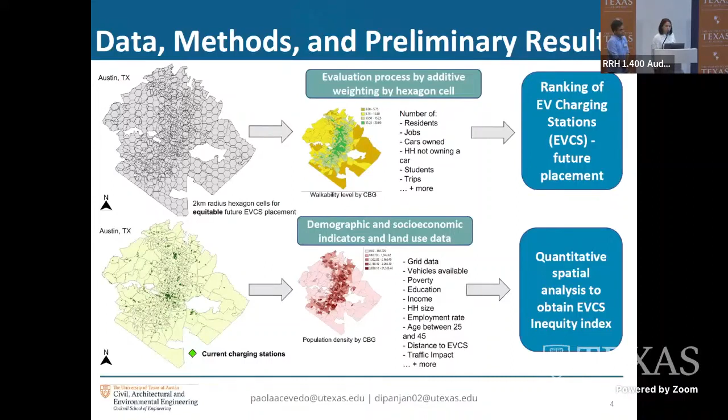Preliminary results show that 32% of census block groups contain the current charging stations, of which 75% are predominantly white neighborhoods. And there is a perceived inequity for low and medium income areas, because almost 50% of the charging stations are located in high income census block groups. We aim to address the increased EV adoption and the challenges of placing these new charging stations with grid constraints and land use constraints.

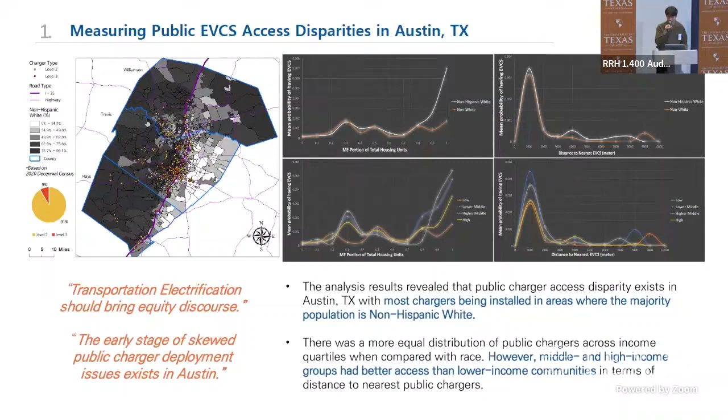So for our first study, the public electric vehicle charging station access disparity measurement confirms that Austin is currently experiencing the early stage of public charger deployment issues. For instance, the non-Hispanic white population will have a higher probability of having public electric vehicle charging stations than the non-white population, and also the upper middle and higher income quartile groups will likely have a higher probability of having chargers than the low income regions, as we control the portion of multifamily housing and the distance to nearest public charging stations.

And based on our descriptive analysis, the statistical test using a nonlinear model also confirms that the ratio of non-Hispanic white population, number of registered EVs, household income, the ratio of above the poverty level, and the distance to electric vehicle charging stations all have a significant impact on the probability of having public electric vehicle charging stations. So here, we conclude that historically disadvantaged communities, like race and income groups such as lower income and communities of color, also experience a more pronounced disparity in Austin too.

And then for the second pilot study, we moved on to uncovering the hidden spatial disparity involving electric vehicle ownership. Here we employed K-means unsupervised machine learning techniques, which went through the optimizing process using the silhouette score calculation and the elbow method, and which later went through the statistical mean tests, known as ANOVA and Tukey's, to tell the significant difference within the clusters.

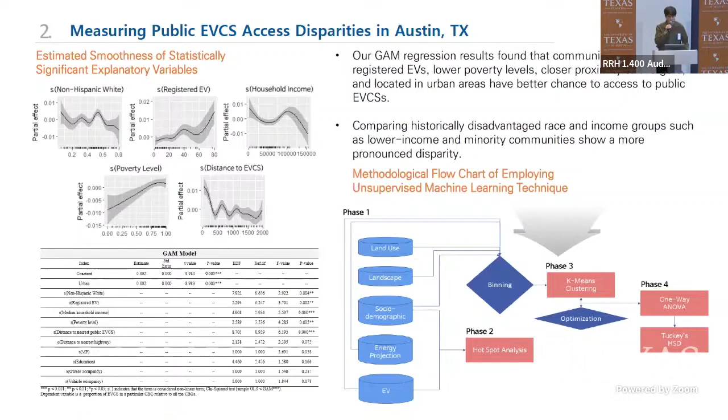So first of all, for the simplified version, the hotspot analysis result, which only uses the explicit EV ownership data, shows that the hotspots where EV ownership is high have a 29 percentage point higher chance of having non-Hispanic white population than cold spots, and the mean median household income in hotspots is 81% higher than the cold spots. And this result is obvious because we all know that the I-35 interstate highway demarcates the city between the east and west side of the city. And we all know that the west side of the city is the region where white alone and higher income

In West Austin, for instance, there was a cluster with a high EV registration rate composed of a greater portion of white alone population, higher income and education levels with graduate or professional degrees, and ownership of multiple vehicles. And notably, these clusters had more single-family housing units and open space land use, but were also projected to consume greater site energy, even though they own multiple vehicles and EVs.

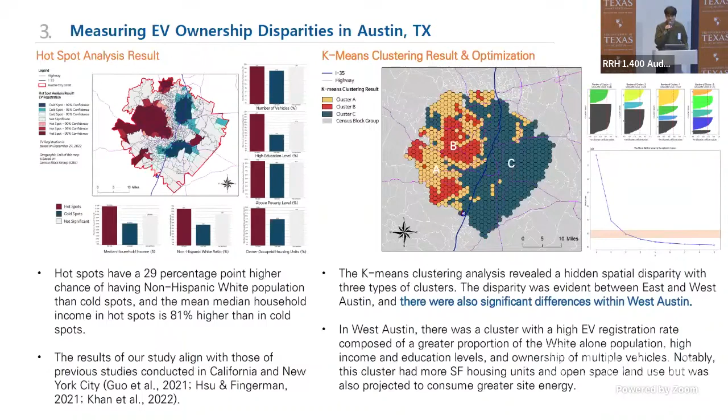Next, we go to clean hydrogen. Ammonia reforming to hydrogen using non-equilibrium plasma discharges. The PIs are Fabrizio Bisetti, Thomas Underwood, and we have Drew.

Right, correct. Yes, so I'm the PI on the project. And so I'll be telling you about some work that we've done together with Thomas Underwood. He's the co-PI on the project. Drew and Sai are the 2 students working on the project.

So we're interested in ammonia reforming to hydrogen as a way to add value to ammonia. And the way we want to do that is through non-equilibrium plasma discharge. Of course, there is a poster later on that I encourage you to visit where Drew and Sai are going to be there. So the basic idea here that we're pursuing is that plasma discharge may make reforming of ammonia to hydrogen, either complete or partial, much more efficient.

So we acknowledge the fact that ammonia has great potential as a hydrogen storage, as well as a hydrogen vector, as well as directly as a carbon-free fuel for power generation. You want to reform it to hydrogen. You want to do that through the 2NH3 to 3H2 plus N2 reaction. That is usually done by transition metal catalysis at 600 C and elevated pressure.

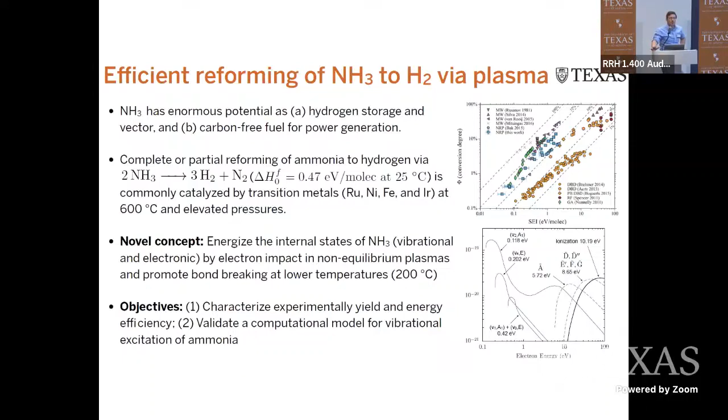So the idea is that we want to take ammonia and use plasmas to energize its internal degrees of freedom and make it effectively a non-Boltzmann distribution of the internal degrees of freedom. The idea then is that when ammonia is energized, it's gonna react more readily with the catalyst at lower temperatures. So ultimately, you wanna achieve the same conversion efficiencies, but at significantly lower temperatures, opening up the potential for distributed ammonia reforming. The way we energize the internal degrees of freedom is by having electrons impact the ammonia, and once the electrons impact ammonia, they're going to energize its internal degrees of freedom, mostly vibrational excitation.

So here are 2 slides on our preliminary results. And again, I encourage you to talk to Drew and Sai during the poster session. The preliminary experimental data demonstrates that hydrogen is produced when a stream of ammonia is subject to radio frequency excitation with electrons that have fairly low energy. And again, vibrational excitation of ammonia and subsequent perhaps decomposition to hydrogen is optimally achieved at about 0.1 to 0.5 eV.

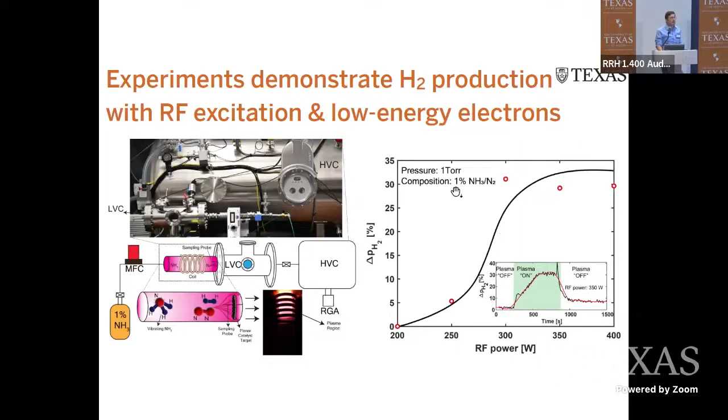And what you see on the right-hand side here is a plot of the partial pressure of hydrogen that is formed downstream of a radio frequency discharge. As the radio frequency power increases, we start seeing more and more hydrogen being formed. Now, this is without a catalyst and at very low pressures down to 1 torr.

And so this, of course, is modeling as opposed to an experiment, but we're working the experiments towards proving or disproving this model prediction. If in fact this model prediction is accurate, that means that having vibrationally excited ammonia allows an extra degree of freedom in tailoring the catalysis of ammonia to hydrogen.

All right, so good afternoon, everyone. My name is Jing Lian, and I'm a first-year grad student in Dr. Wang's lab. Today, I'll be presenting my research on computational modeling of nickel oxyhydroxide for water splitting.

So hydrogen has been an important source of energy in the renewable industry over the past decades, and the demand for hydrogen is projected to increase 4-fold by the year 2050. So to meet this demand, it is important for us to refine or develop our current hydrogen production methods. One of these methods is electrochemical water splitting, which can be split into 2 reactions, the hydrogen evolution reaction, HER, and the oxygen evolution reaction, OER. The oxygen evolution reaction is the kinetically limiting step in electrochemical water splitting because it involves a 4-electron transfer in the overall process. So it is important for us to develop a cost-effective and efficient OER catalyst to facilitate the overall hydrogen production.

Nickel oxyhydroxide has been reported as a promising OER catalyst, especially in alkaline media. Recent studies also found that the catalytic activity can be further enhanced by transition metal alloying, so in this case, we'll be introducing iron atoms into the nickel, and also by introduction of structural disorder to produce an amorphous surface. Despite knowing this, the optimization of nickel iron oxyhydroxide is limited due to the poor knowledge of the structure activity relationship.

To approach these questions, our research group proposed a combined computational and experimental approach, where we will benchmark simulated and measured X-ray absorption spectroscopy to study the structure activity relationship. By doing this, we will be able to illustrate the combined effect of mixed transition metal and amorphization on the catalytic performance of nickel iron oxyhydroxide.

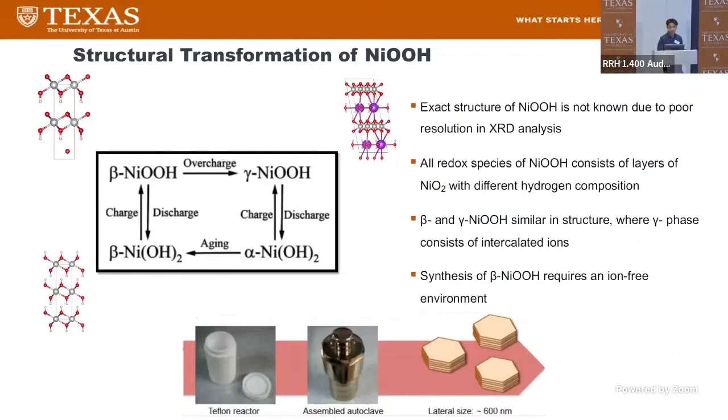These are the models of nickel oxyhydroxide I use in my study right now. The native structures are developed by directly removing one hydrogen atom from the nickel hydroxide. The staggered structure is the duplication of the native structure in the horizontal axis, with every second hydrogen atom in the opposite location. The alternate layer structure consists of an interchanging layer of nickel hydroxides and nickel oxides.

This structure is proposed by another computational group developed using a genetic algorithm approach. The last structure is the modified staggered structure, developed by duplicating the native structure in the vertical and horizontal axis, and also by slightly shifting the second layer by half a formula unit cell.

We also found that the relative energy difference between the alternate layer structures and the modified staggered structures is as low as 0.005 electron volts. This indicates that both structures are highly stable, and the actual crystal of beta nickel oxyhydroxide might contain a mixture of these structures.

Overall, we are able to determine that the alternate layer structures and modified staggered structures would be the best models to predict the actual crystal of beta nickel oxyhydroxide. With this as a foundation, we will be able to develop structures for nickel iron oxyhydroxide, and with the help of our experimental collaborators from Dr. Resasco and Dr. Mullin's lab, we will be able to elucidate the structure activity relationship in the future.

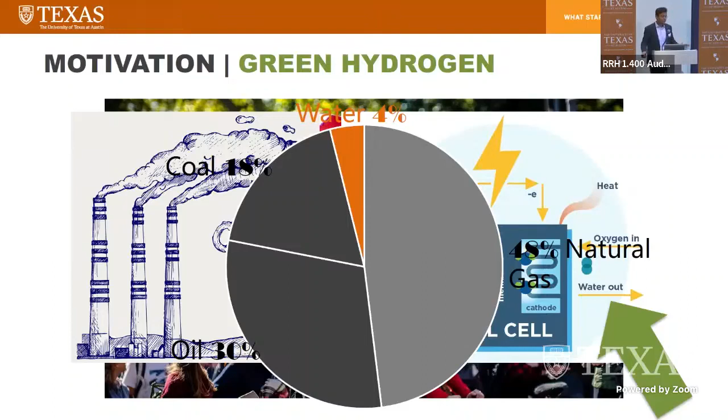However, the rest, 4% of the hydrogen, which is actually green hydrogen, comes from electrolysis of water, or in simple terms, water splitting. This is where we want to make a dent by increasing its share, by making this process as cheap as possible. One of the ways you can make water splitting cheap is through finding effective catalysts that are also non-rare earth materials that can break the bond between hydrogen and oxygen with minimum activation energy barrier.

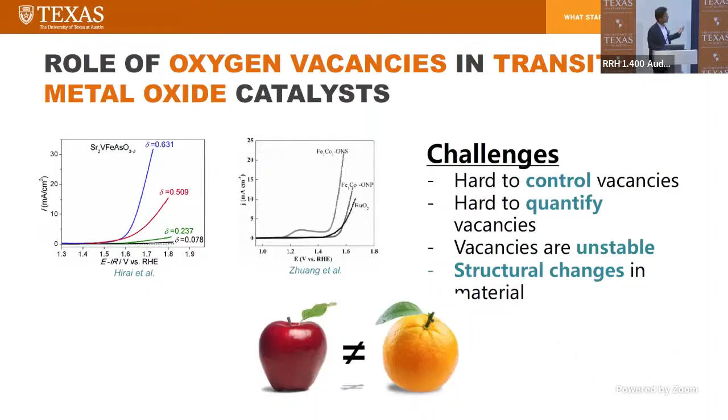But what we lack today is understanding of the mechanism for this. The reason it's hard to understand the mechanism is because of the challenges associated with it. It's hard to control oxygen vacancies in your material. Even if you have created oxygen vacancies, it's hard to quantify the actual oxygen vacancy concentration. Also, oxygen vacancies are quite unstable, so they may not last long in the material. Finally, most processes that lead to oxygen vacancy creation also cause structural changes or damage to the material, leaving you with a comparison between apples and oranges.

We in the Milliron group have developed a synthetic approach to control the formation of oxygen vacancies in nanocrystals using spectator metal salts. We think this is a great step forward, which would lead us to understanding how oxygen vacancies play a role in catalyzing oxygen evolution reaction in water splitting.

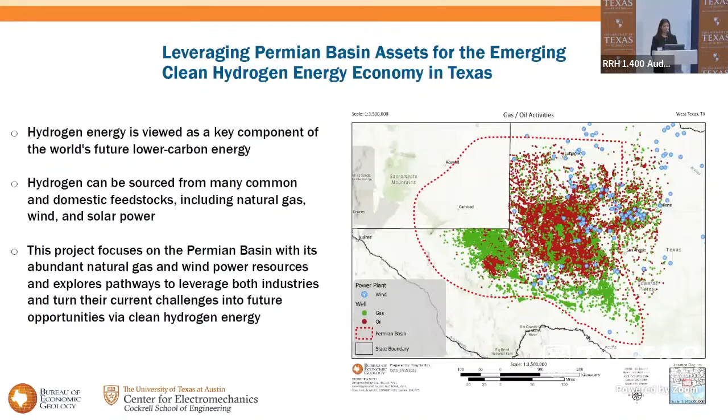Our research focuses on the Permian Basin with its abundant natural gas and wind power resources, and explores pathways to leverage both industries and turn their current challenges into future opportunities via clean hydrogen energy. The Permian Basin accounts for 40% of United States oil production and 25% of its natural gas production. It is also a leader in solar and wind development, with more than 37 gigawatts of wind power installed capacity, accounting for 24% of the electricity grid in Texas.

The second technology is water electrolysis that uses wind power as the electricity source, splitting water into hydrogen and oxygen. In the levelized cost analysis we performed, we obtained a cost of $1.5 per kilogram of hydrogen produced in the SMR process. 25% of this cost is regarding CO2 capturing, and the feed cost price, meaning the natural gas price, is the key driver. In the case of electrolysis, we obtain a levelized cost of $2.6 per kilogram of hydrogen, and electricity price is the key driver.

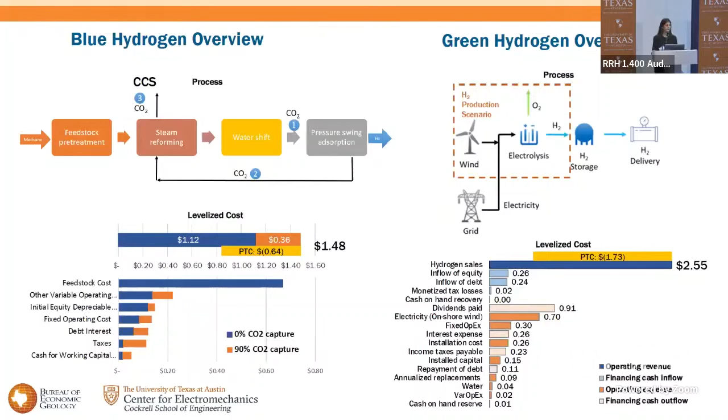To summarize, hydrogen is key in decarbonization, and the Permian Basin plays an important role in this recent challenge. If we assume a PTC of $1 per kilogram of hydrogen in SMR technology and $3 per kilogram in electrolysis, we can observe that this credit can make them both cost competitive to one another. Another important factor is that both pathways have low water consumption, around 5 gallons per kilogram of hydrogen.

Moving forward, we plan to study the value of co-products such as CO2 for EOR and oxygen for ATR hydrogen production. We also plan to study infrastructure requirements for transportation and storage of hydrogen and energy carriers such as ammonia. Local demand can cover initial expansion of hydrogen, however takeaway capacities to a regional market such as the Gulf Coast could further expand production. Overall, the Permian Basin is a promising location for the development of hydrogen energy. Thank you.

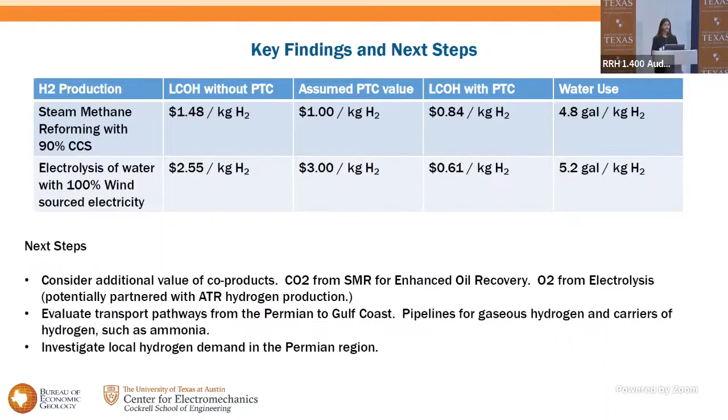Next, we have hydrogen production at natural gas wellheads. Liu Yingda and Kishore Mohanty are the PIs, and Dina. First slide.

Good afternoon, ladies and gentlemen. My name is Dina Al-Hosari. I'm a first-year PhD student at the Petroleum and Geosystems Department. I'll be giving a brief presentation on our research topic titled Hydrogen Production at Natural Gas Wellheads. Our research team consists of Dr. Yingda Liu and Dr. Kishore Mohanty as the principal investigators, myself, and Ha Wang as the graduate students working on it.

The main motivation behind this research is that hydrogen plays an indispensable role as a clean energy carrier in future decarbonized energy systems. Steam methane reforming remains a major route to produce hydrogen. However, conventional existing SMR gas production and carbon dioxide sequestration remain largely separated with little integration.

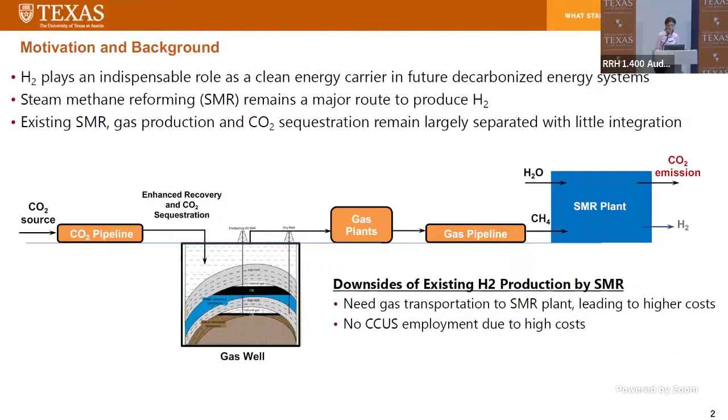So what we're proposing is an innovative process that integrates sorption enhanced SMR, natural gas production, and CO2 sequestration. Instead of transporting methane gas from far gas well sites, why not have the SMR plant right next to the gas wellheads? Instead of using a conventional SMR unit, you'd use a sorption enhanced SMR unit. The methane enters the reformer where it reacts with steam to produce hydrogen and undergoes a water shift reaction, while the CO2 is absorbed instead of being emitted like in conventional SMR. The CO2 is then injected back into these gas wells where it will enhance gas recovery and be sequestered.

So basically, the significance would be that you're producing low carbon hydrogen, also known as blue hydrogen. You're also simultaneously utilizing and sequestering the CO2, enhancing gas production. You'll also create hydrogen hubs in Texas and subsurface hydrogen production technology.

The project consists of three main tasks. The first involves developing reservoir models considering the effect of CO2 injection on gas production. The second involves identifying and evaluating high-capacity CO2 adsorbents for CO2 and hydrogen separation. The third involves carrying out a techno-economic analysis of the integrated process.

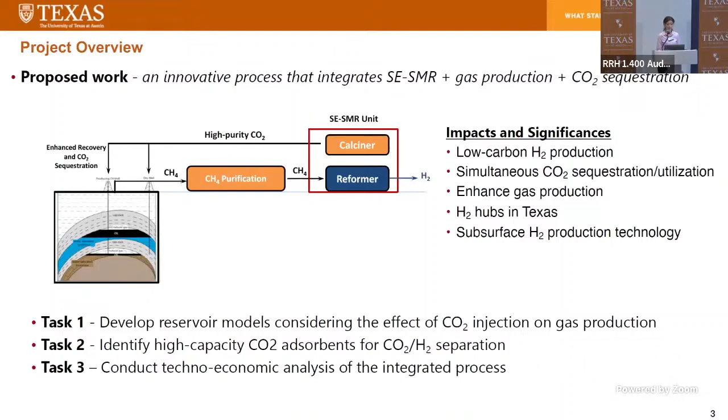So our progress so far in terms of task one: we've already established a representative 2D reservoir model for gas recovery under CO2 injection using CMG-GEM software.

We've also carried out sensitivity analysis to examine the effect of permeability heterogeneity, formation thickness, and CO2 injection rate on the gas recovery factor. As for task 2, we've designed and constructed an apparatus for testing the performance of the CO2 adsorbents. We've also carried out a literature review to identify a few adsorbent candidates for testing. We've also performed preliminary characterization on those potential adsorption candidates.

As for task 3, we've completed the chemical process simulation setup for conventional SMR and sorption enhanced SMR using Aspen Plus software. We've also conducted sensitivity analysis of the pressure, temperature, H2O/CH4 ratio on the methane conversion.

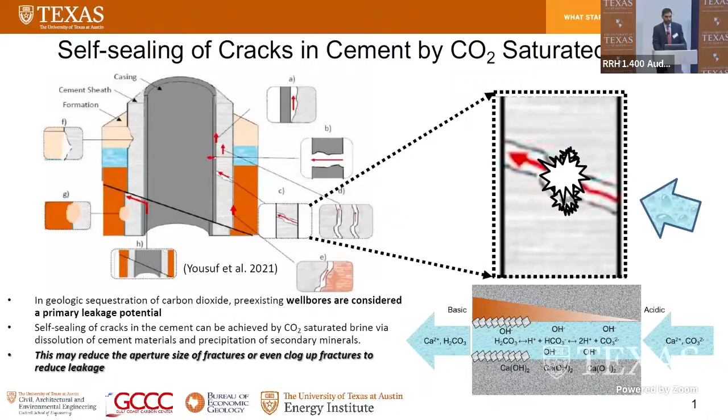So the brine that we inject CO2 in and mixes together is acidified. That dissolves some of the cement, releasing hydroxide and calcium ions, as well as some other free ions, and pushing this carbonate reaction towards the formation of aqueous carbonate, and then a bunch of those free calcium ions. So our approach is to look at this and its capacity to seal up some of those fractures and some of those pathways. And how we do this is we create a microfracture flow cell.

So we take Class H Portland cement, which is used in the construction of wellbores. We make a bulk sample in anaerobic conditions. We fashion it to the dimensions of this chip that we then encase in PDMS, and then we mechanically induce a fracture, and then connect it to our closed system loop and flow our simulated CO2 fluid through there, which is CO2 saturated brine in equilibrium with calcite.

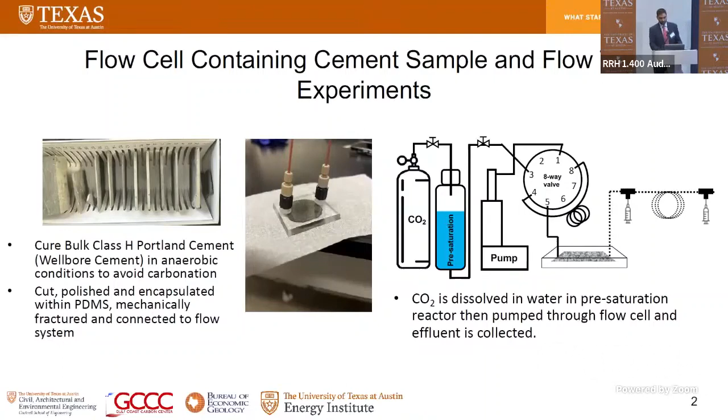And so what we found is that this process actually does clog up the fracture. The longest it's taken so far is 15 hours. There's no more communication between the inlet and the outlet. And so we do see this process actually completely inhibiting the flow across the fracture. But in addition to just that pressure buildup and failure of communication between the inlet and the outlet, we also see some characteristic behavior of the precipitate that's formed within that fracture.

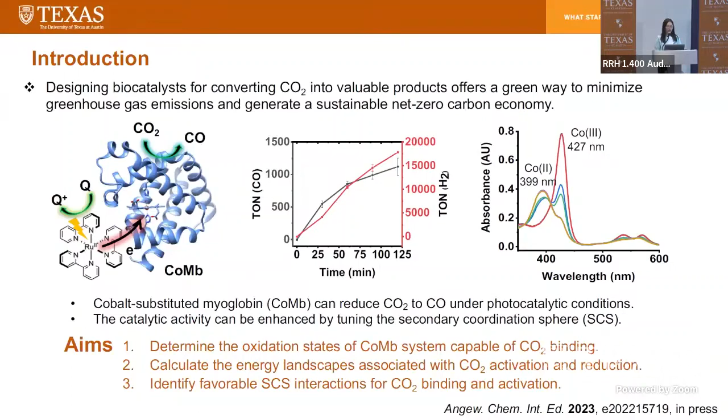The methodology that we apply for this study is called QM/MM, which stands for Quantum Mechanics and Molecular Mechanics method. And when we apply this method to a large system such as myoglobin with hundreds of amino acids, tons of atoms, we need to carefully choose the region for QM as well as the MM region to minimize the computational load. And after we choose the regions for QM/MM, we use this methodology to first perform benchmarking.

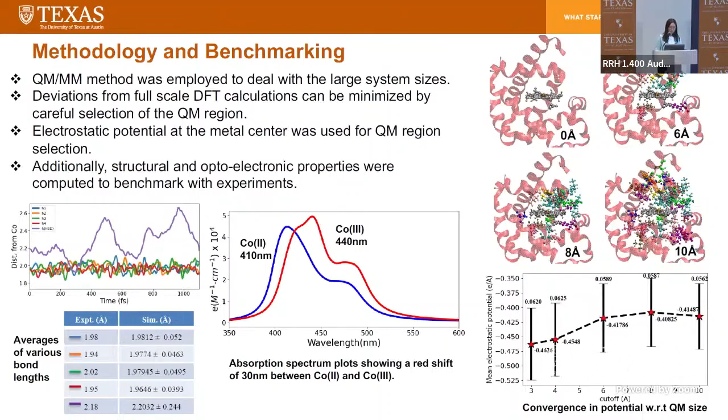We can reproduce the high resolution crystal structure by calculating the bond distances associated with the cobalt and the coordinating nitrogen atoms from both the porphyrin as well as the histidine ligand. We can also do benchmarking to reproduce the electronic absorption features that we observe from experimental studies. And we can see the shift of the absorption spectrum from the cobalt(II) oxidation state to cobalt(III). This actually reproduced our observation from experiments. So with those results, we can now apply the method to the system to make some predictions.

Our preliminary simulation results show that carbon dioxide does not bind to the cobalt(II) oxidation state. However, it can bind to the cobalt(0) or cobalt(I) oxidation state with similar binding affinities, which means that a lower oxidation state than cobalt(II) is required for CO2 binding and activation. We also performed the calculation for the CO2 binding system, and we find that before CO2 binding, there is charge delocalization on the porphyrin system, and upon CO2 binding, there is charge transfer from the porphyrin onto the CO2.

And with these promising preliminary results, we want to further study and calculate the energy landscapes associated with CO2 activation and reduction into carbon monoxide, and use this established methodology to identify the favorable secondary coordination sphere for CO2 binding and activation. And eventually we want to adopt machine learning techniques, which really tackle the timescale limit, to help us calculate the free energy in a faster timescale.

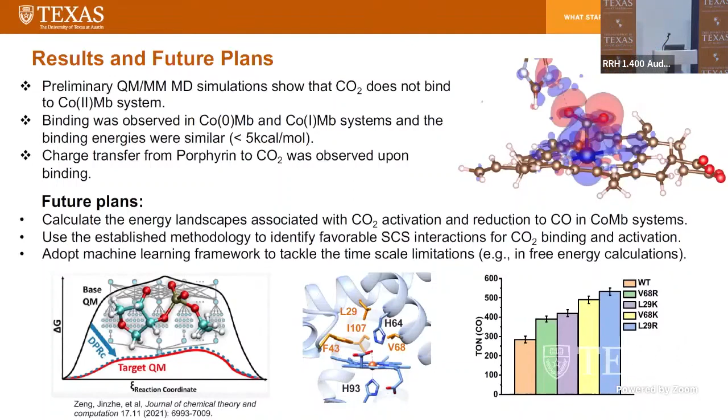Next, we have impacts of geochemistry on carbon dioxide adsorption in organic rich mud rocks. PIs are Zoya Heidari and Nicholas Espinoza.

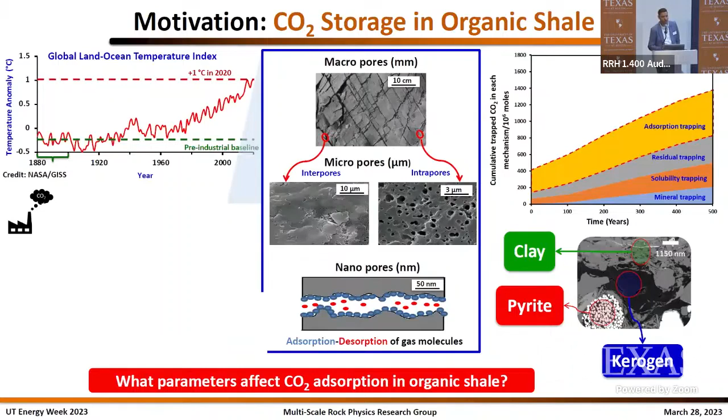So there's a need to understand what are the parameters affecting the CO2 storage in these kinds of reservoirs. Here we are modeling two main constituents of this reservoir, which are clay and kerogen. The kerogen structures we are modeling represent kerogen of different types and different thermal maturity, while for the clay structures we are modeling, we make sure that they represent the pore size of the clay underground. And we made sure also that they represent the chemical structure, and we unified their pore size to check the influence of clay geochemistry on the adsorption process.

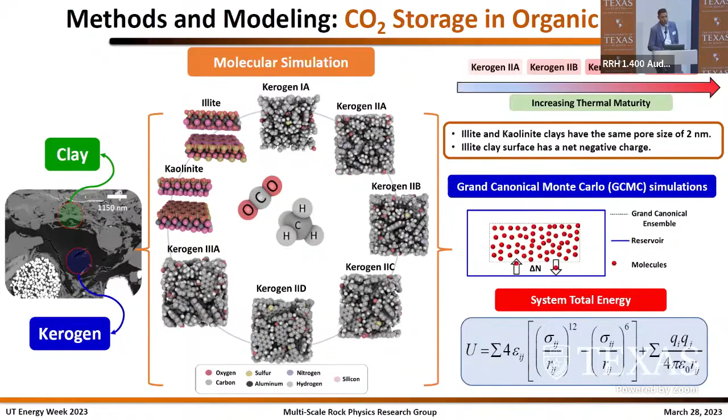The adsorption simulation was carried out in Grand Canonical Monte Carlo simulation, where the chemical potential, temperature, and volume are kept constant, while the number of gas molecules is allowed to fluctuate to mimic the actual adsorption experiment or the actual adsorption process. The total system energy was just a summation of Lennard-Jones potential and the electrical Coulombic potential.

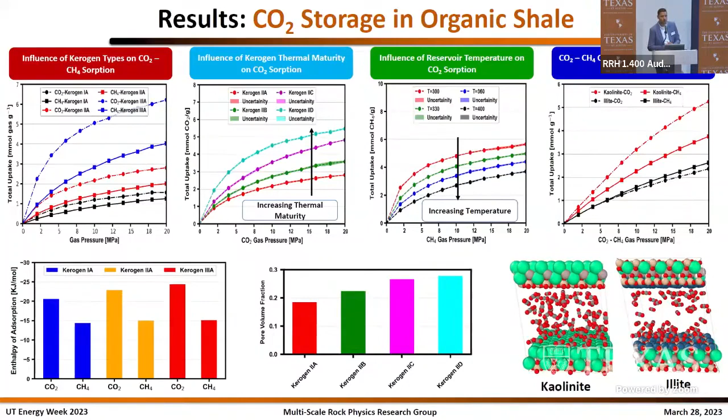And finally, for the clay structures, we noticed that kaolinite clay has more affinity to store CO2 in our models than illite due to the negative surface charge of the illite clay surface. This negative surface charge led to some repulsion forces between the polar CO2 compounds and the surface of the clay. More information you can find during the poster session.

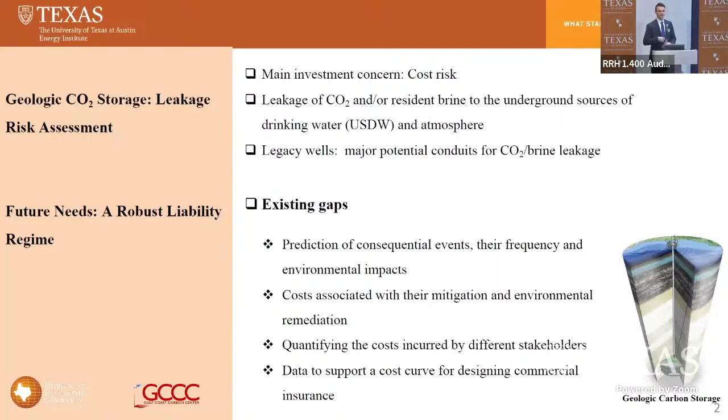And so to answer this question, we need to predict the consequential leakage events, as well as their frequency and the environmental impacts that each event has, as well as the costs associated with their environmental remediation, as well as the mitigation of these leaks. And then to quantify those costs that are incurred by the different stakeholders of the project. And by combining all of these three things, we can develop a cost curve for designing commercial insurance for future geologic CO2 storage projects that will help promote continuing investments into these type of projects as well as larger ones.

So our methodology to tackle this problem consists of these main elements. So we develop a time-sensitive statistical probability model to determine the potential leakage events of CO2 storage. And we do this based on the leakage rates as well as the cumulative leakage as well as leakage duration. And then we can assess the environmental impacts that each leakage event has. And so, for example, CO2 leakage to the groundwater can alter its geochemistry, CO2 leakage to the soil can affect its plant and microbial environment, and CO2 to the atmosphere can be harmful for humans as well as land animals.

And then once we have the probability of a leakage event happening, as well as the environmental impact that it could potentially incur, then we can quantify the costs that would be incurred by preventing such an event from happening, as well as the mitigation of this event. And then we can determine, with stakeholders such as the investors of the project, what costs each individual stakeholder is responsible for in the event that a leakage does happen.

And so we simulated our leakage events using the TOUGH2 T2Well software. And so how we approached this problem was to create a coupled reservoir model where the reservoir and wellbore are two different subdomains and the fluid is controlled by different physics, and there is turbulent and non-isothermal flow, as well as upward and downward flow of CO2 and brine. And so we solve the equations of non-isothermal, multi-phase, and multi-component flows. And we plan on developing the probability distribution of the leakage rates, considering a wide range of geological and operational parameters, such as the distance of the injection well to the legacy well, the rate of injection, the distance to the shallow aquifer, et cetera.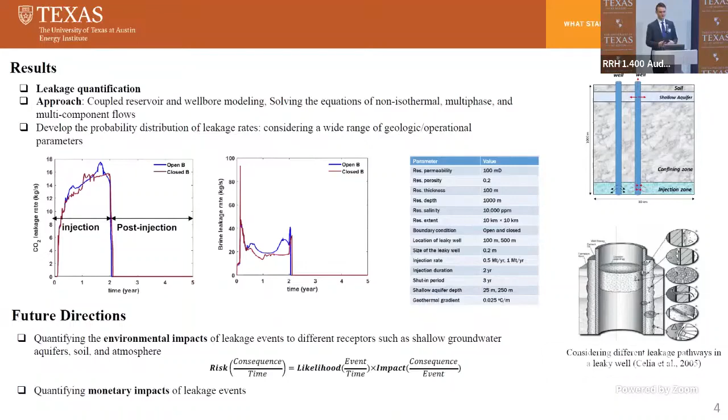Next, we have carbon dioxide hydrates-based carbon sequestration on the seabed. PIs are Vaibhav Bahadur and Yingda Lu, and Awan is presenting.

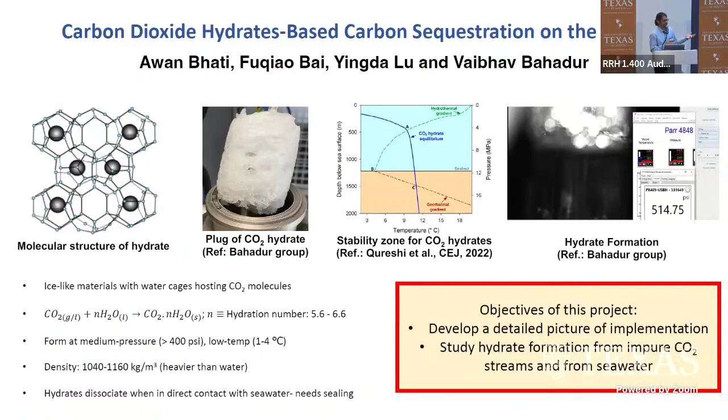And so the objectives of this project is essentially to look at how do we implement such a technology and bring it to market. And the other thing is that, can we use this technology for impure streams of CO2? Let's say we only have a 50% pure CO2 stream. Can we still use this technology to store CO2 while also capturing the carbon? So I'll talk about how we are thinking that this technology can be brought to fruition.

So it will essentially be a two-stage process. First process will be where the CO2 line, which is coming from a capture site, would be converted into CO2 hydrate slurry inside a bubble column reactor. So for each pass, some of the gas will be consumed with the water into CO2 hydrates. The rest will need to be recirculated back for further consumption. And then this slurry will need to be accumulated and then go into another chamber where the slurry would be compacted into a CO2 hydrate plug.

Now this plug would need to be sealed, essentially providing an impermeable coating around the plug, and then they can be stored on the seabed. So from basic calculations, we see that if we look at a 3-meter high CO2 hydrate plug, only a kilometer square is needed for a megaton of CO2 storage, which are phenomenal numbers.

And so an alternative approach we're looking at is that we could make the slurry on the coast and then transport the slurry into the ocean, and then for further compaction, sealing, and disposal. One key benefit is that the ocean is already providing us the pressure and temperature needed for hydrate formation and stability. So refrigeration or pressurization will not be needed.

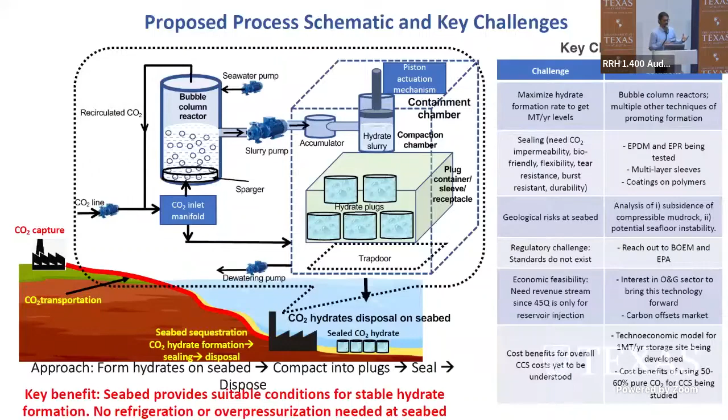There's a few challenges with this technology, again, like the sealing part, where the sealing needs to be environmentally friendly but not degradable. And then there's other challenges like economic challenges where there's no revenue stream for a technology like that. If we do get CO2 and we store it, who's going to pay us for that?

The current work that we're looking at is threefold. First is that we have an experimental setup where we control flow rates on one side, we form hydrates in the middle, and we measure the fluid on the other side, and we evaluate the rate of hydrate being formed in each pass.

Secondly, we also have a computational model where we are simulating the bubble column reactor, and we are seeing that if the gas flow rate is increased, the amount of gas consumed is increased, but the percentage that's converted in each pass is decreasing. So there's going to be a techno-economic sweet spot in the middle, and that's what we're optimizing right now.

And on the third side, we're also looking at hydrate slurry transport. Dr. Lu's group is working on this, where they're using a collision theory for CO2 hydrate slurry transportation and looking at pressure drops and energy requirements for hydrate slurry transport. I'll be happy to discuss more of the details on this during my poster.

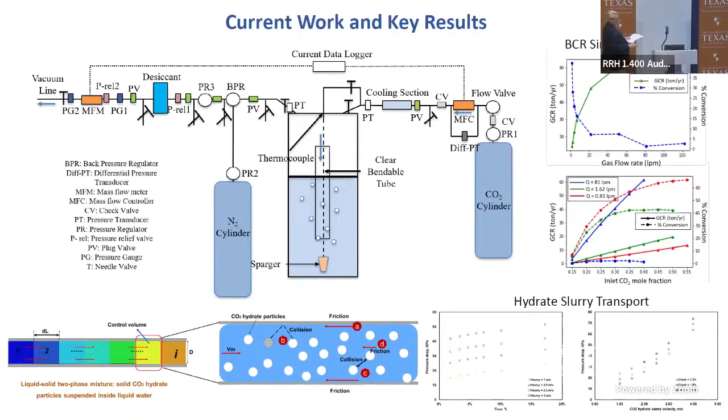Next, we have laboratory experiments and modeling to accurately evaluate critical CO2 saturation for geologic carbon storage. Our PIs are Hailun Ni, Sahar Bakhshian, and David DiCarlo, and Jose is presenting.

Good afternoon all, I'm Jose Willis. I'm in the Petroleum Engineering Department, but I work for the Gulf Coast Carbon Center within the Bureau of Economic Geology. Today I will briefly introduce our ongoing work in laboratory experiments and modeling to accurately evaluate critical CO2 saturation for geologic carbon storage.

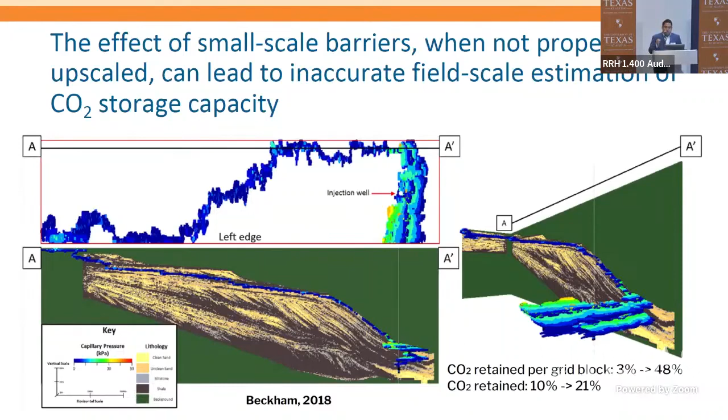Effective geologic carbon storage projects require good simulations to obtain accurate retention capacity. But the outputs of our model will only be as good as our inputs, which are highly affected by small-scale heterogeneities. Previous simulations have shown that even with inaccurate CO2 critical saturation, about 48%, only 21% of that CO2 will remain trapped inside the reservoirs. So critical CO2 saturation is an important input parameter that has been studied, as it controls CO2 saturation and trapping capacity.

Now that we understand why it's important to model these small-scale heterogeneities and understand how CO2 will flow and be trapped inside reservoirs, it's important to conduct intermediate-scale sand experiments. In our lab, we are able to build any type and degree of heterogeneities inside the sandbox. We can also conduct multiple multi-phase flow experiments where we capture CO2 critical saturation fields using light transmission techniques, but mainly we conduct these experiments to be as close to reality as possible, because we want this to be buoyancy driven flow.

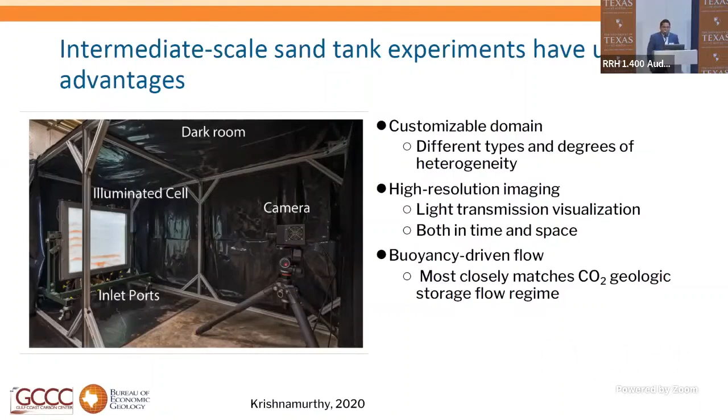From our work over at least the past year, we demonstrate that even with slight changes in bed form architecture, we see different plume migration, different breakthrough saturation — in this case the critical CO2 saturation — and different breakthrough time. As we can see in these plots, it's basically the same bed form ripples, but we made slight changes in the phase of the crest of those ripples. Just by looking at the images, we see a different saturation field with just these slight changes.

For our future work, we plan to validate these results with core flow experiments and simulation. I would like to invite you all to our poster session, located at stand 14. And I'd like to thank the Energy Seed Grant for our funding. Thank you so much.

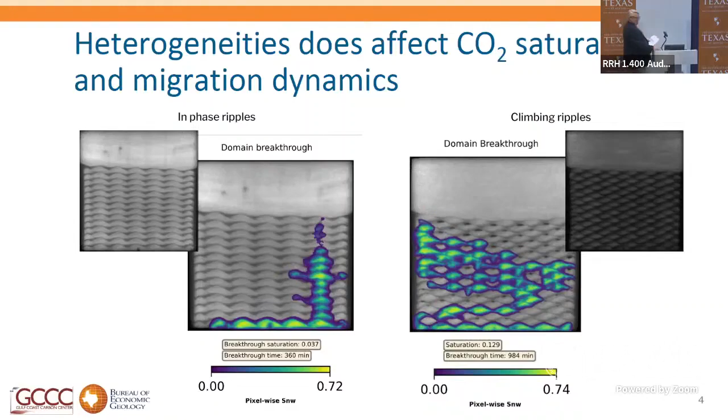With that, we now move to environmental monitoring, supply chain, circular economy, and policy. Our first presentation in this category is Go Clean Fast: the political economy of green industrial policy. PIs are Josh Busby, Nathan Jensen, and we have Paul presenting.

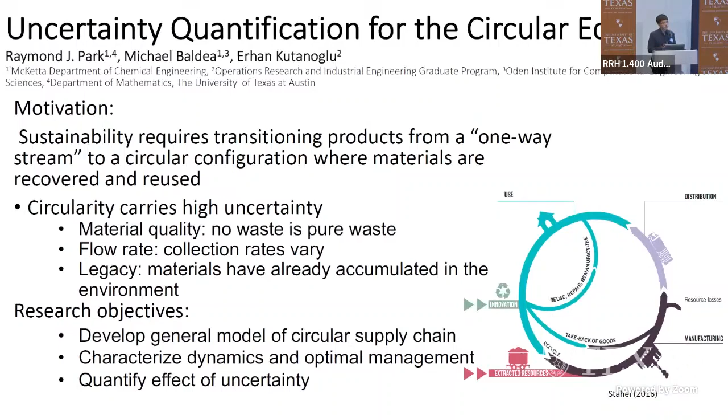To model the circular economy, we use something called a state task network. We have 4 different states that the product undergoes: first the product is manufactured, then consumers utilize the product, then it needs to be collected, such as in the garbage can, and then it needs to be reprocessed again. However, depending on how efficiently we can reprocess these goods, we need to add some raw material, called virgin raw material.

By combining the reprocessed material with virgin raw material, we can create more products. We also model these using a first order time delay, and the transition between each of these material states is determined by a transfer function, a time delay, a processing capacity, and a material inventory, which we see in the red boxes.

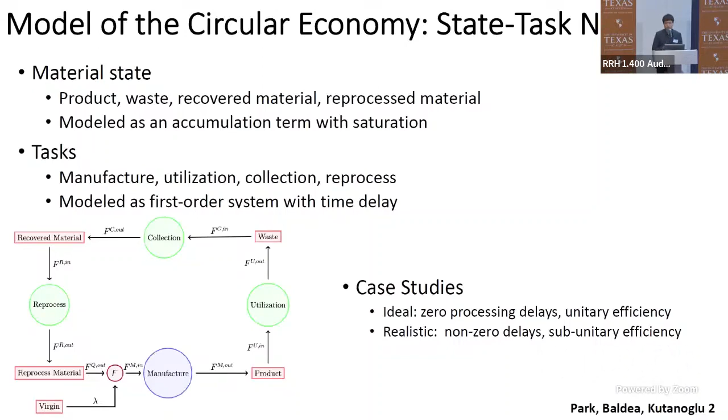We consider 2 case studies. We have the ideal case study, where there are no processing delays, and we assume all material can be recycled fully. But this is not the case in the realistic world, because we also have information delays — for example, markets like Walmart or Costco may ask for a certain number of goods, but it takes time for that information to reach manufacturing sites. We also have sub-unitary efficiency, since obviously not all waste material can be reprocessed, so we add a less-than-1 efficiency into the system.

We used a Monte Carlo simulation rather than something like polynomial chaos expansion, because of the nonlinearity involved in the system. We've seen that there's a strong impact of the variability of the processing capacity on the inventory level.

This calls for us to find an inventory policy to combat the negative effect of the uncertainty. We rely on a feedback control loop, which will update our processing delays and operation capacity as new information becomes available in the supply chain. We expect to take a more probabilistic approach, so that we can tune our inventory policy depending on what probability we want our inventory to remain at. Thank you.